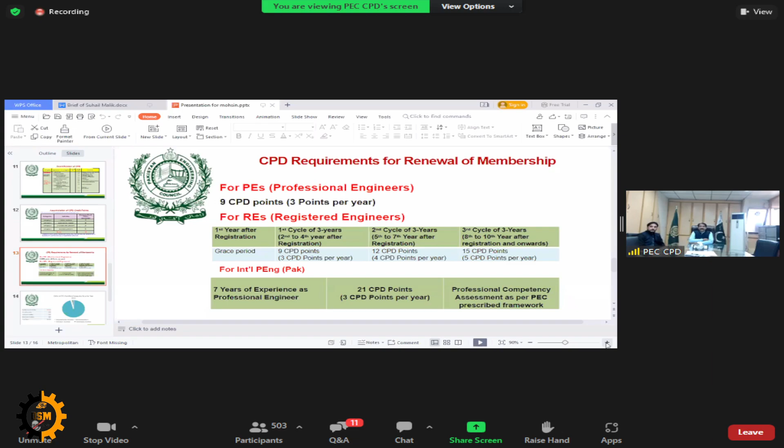So 7 years after PE and 21 CPD points will be required along with other documentary proof of the projects and other things. تو یہ فوکس کیونکہ میرا CPD پوائنٹس پہ ہے, لہٰذا اس کی تھوڑی سی تفصیل بتانا ضروری ہے کہ CPD پوائنٹ جو अर्न होते हैं वो 4 कैटेगरीज में अर्न होते हैं.

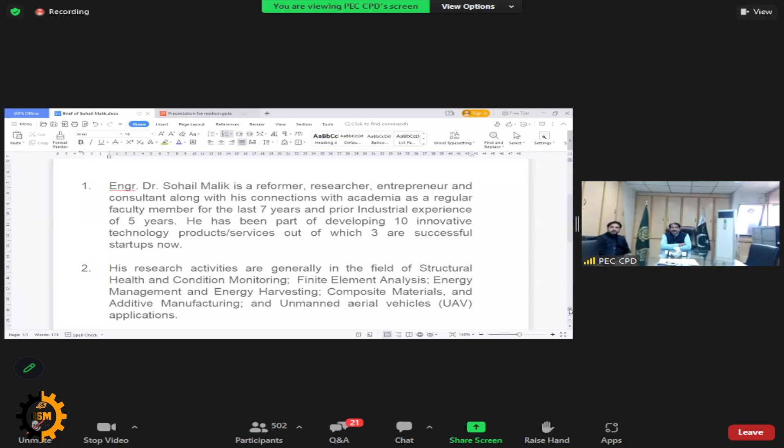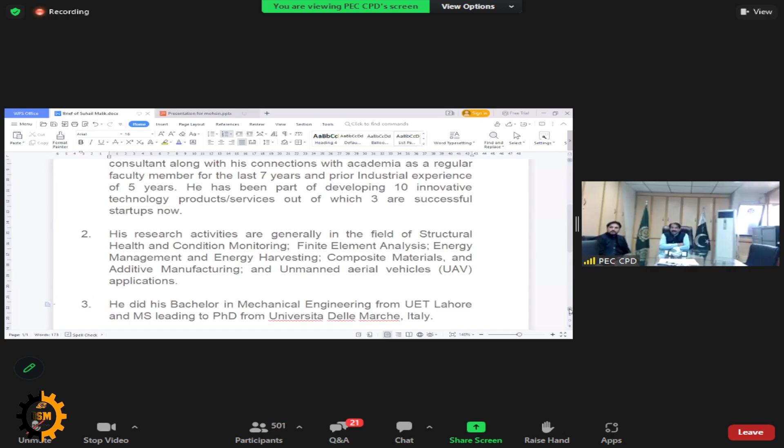Researcher, entrepreneur and consultant along with his connections with academia as a regular faculty member for the last 7 years and prior industry experience of 5 years. He has been part of developing 10 innovative technology products and services, out of which three are successfully startups now. His research activities are generally in the field of structural health and condition monitoring, finite element analysis, energy management, and energy harvesting.

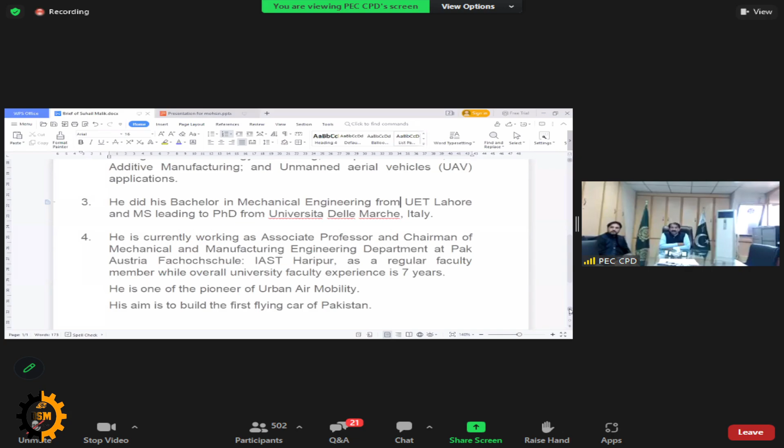Composite materials, additive manufacturing, and unmanned aerial vehicle applications. He did his bachelor's in mechanical engineering from UET Lahore and MS leading to PhD from Universita Delle Marche, Italy. He is currently working as an associate professor and chairman of mechanical and manufacturing engineering department at Pak Austria Fachhochschule: IAST Haripur, as a regular faculty member, while overall university faculty experience is 7 years. He is one of the pioneers of urban air mobility.

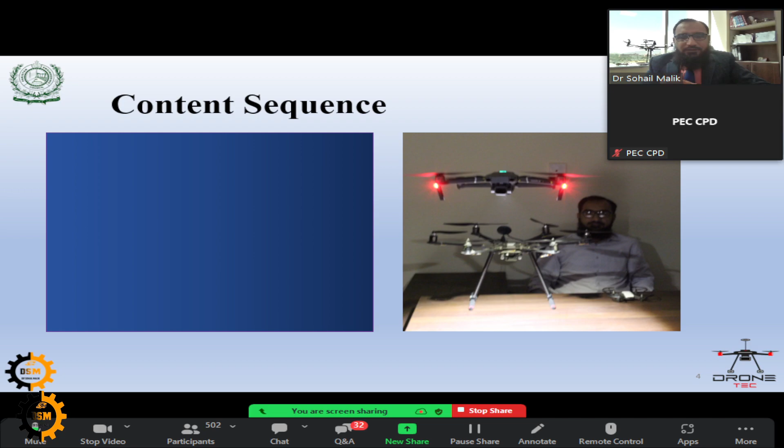Okay, so that was my business profile, and now I will talk about the points I will discuss in today's CPD. The first one is drone introduction. I will tell you what drones are. For those who don't know, and for those who know, you can have some repetition, some practice.

Then I will tell you what is the market size of the drone industry and what potential it has for us Pakistanis. And then I'll tell you how easy drone work is, and how it's a myth that it's a very complex industry and we are not able to do it or make it in Pakistan. So if I'm doing it, and many other friends working in the same industry can do it, you can do it as well.

So I will tell a little bit about it, and then I will tell you the application areas where drones are being used, and of course that would include the discussion of what their potential is in that. And then we have the future opportunities in the drone industries.

I will tell you where you can invest, or if you have the expertise or skills, you can use them. My total conversation is about 30 slides, and if I take 3 to 5 minutes on each slide, you can calculate your time.

And at times I will also try to give you a poll or a question, and if you have internet access at the moment, you can search that and answer me on that.

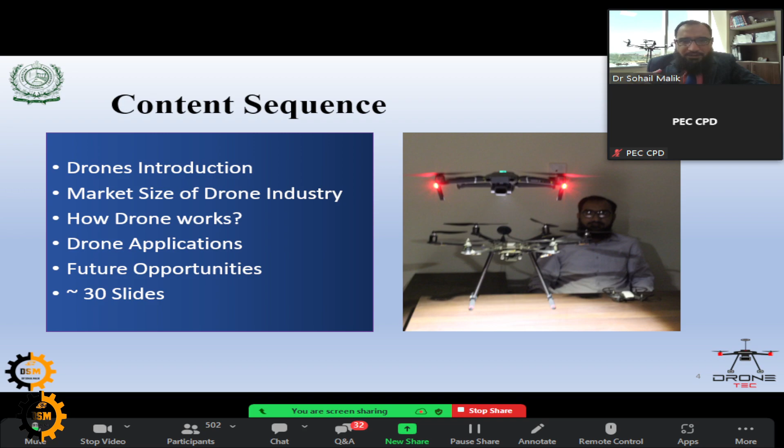First of all, what is a drone? It has many definitions, and the word drone comes from the humming sound - bzzz - if you have something that sounds like that which is flying, that is the basis of the drone. When it came to electronics, basically a drone is a flying robot, a robot which has some portion of automation in it, sensors in it, and a self-powering powered system.

You don't have to plug a wire into it. It is wireless powered, has some battery in it. It is a flying robot, and it is controlled through a remote control. So you have some buttons in your hand, you push the buttons and it moves, and as you command it changes. So typical drones are like this.

And also sometimes it flies autonomously, so you just trigger the control system, and it starts from a single point and completes the job you designed it for and comes back to its initial point without you interfering. So most drones at the moment are semi-autonomous. They are moving quickly towards autonomous, because with the advent of industry 4.0, we are looking for autonomous machines.

Industry 4.0 has a big portion of drones in it, because the fourth industrial revolution will mainly be working with robots, automatic data analysis, and an automatic virtual world, based on if I connect industry 4.0 with web 3. So drones have their specific portion in it - like chat GPT is for AI, drone is for industry 4.0. In industry 4.0, it has the same level of importance as chat GPT has in AI today.

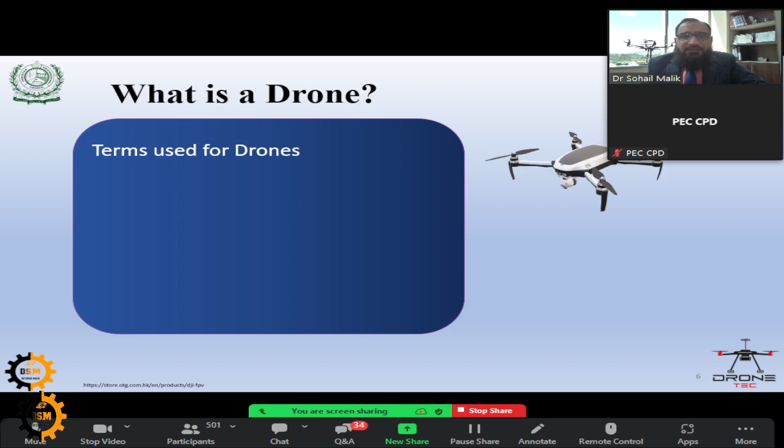If I move forward, we have some interchangeable terms used for drones. If you hear some more terms, they are again drones - it's not that drones are something else and these terms are something else. So UAV, unmanned aerial vehicle, is also a drone - this is another term used for drones. The only property it has is that there is no person, driver, or pilot sitting in it. So UAVs and drones are the same thing.

Also sometimes in research papers, industrial people call it UAS, because it's a system - it has the drone itself, and it is also interacting with a person on the ground or something else on the ground as well. So it is also collectively called an unmanned aerial system. And also I talked about urban air mobility.

So if you see the word UAM, it is also related to drones. The only difference is that it has a person sitting in it, because it is mobility - mobility means movement, and urban means within the city. Normally urban mobility means moving yourself from one place to another. Many of the big companies in the world are working on that - many big names, all the major aerospace industries, are working in the field of urban air mobility, because it has a strong exponential growth expected in the future. I'll talk about it in a few moments.

Then you have another word related to drones - a special type used for racing. You must have seen enthusiast people working with racing drones, wearing goggles on their faces so they can see around, how the drone is watching through its camera. We call these first person view drones, or simply FPVs. They are very fast, and they are very entertaining.

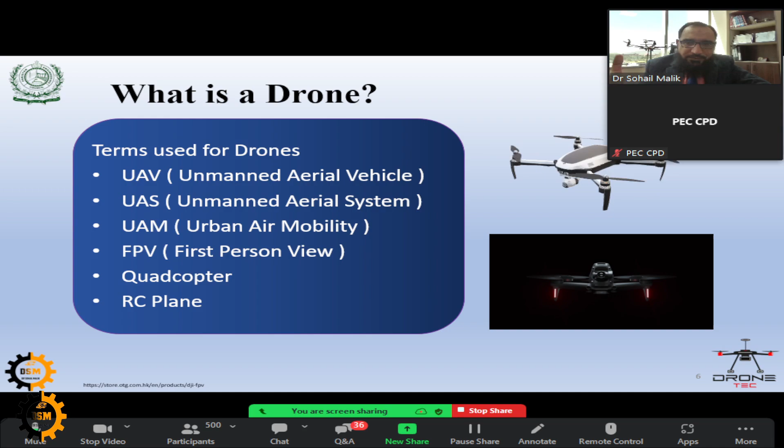We also have hexacopter, we have multi-axial, we have octocopters, and so on. But quadcopter is quite common. And the last word is the RC plane. So some hobbyists, when they use it, they also call it RC plane. Plane means it's aeroplane, it is flying, it is airborne, and RC means it is remote control. So these are some of the interchangeable terms. I'm going very basic so that if you don't have the prior knowledge of it, you can get it.

Moving on, let's talk about the market size worldwide and in Pakistan of the drone industry. And you know that Pakistan is an agricultural country, but also we have done a very good consortium in the aerospace industry as well. You know some names in the military domain, but today's discussion is not related to military at all. So I'm talking about the commercialized uses of drones where we can have a lot of potential. So globally at the moment, if you see the specs which I could get through different resources, in 2022, globally it was a 29 billion USD market.

Compared to many other markets, it's very small if you consider AI or blockchain or other emerging technologies. But it has emerged from 0 billion to 29 billion within no time. And as I told you, it's part of Industry 4.0, so the speculation is very good for it. And if we compare it with Pakistan, currently the drones which are made in Pakistan, and I could get a source for it, it gave me the figure of 1.38 million USD, which is nothing, which is like one grain of sand if you have a full bucket of it.

And this 1.38 million, even I doubt it, because I know all the people who are working in this industry, so I am not sure if it is really the amount of revenue they are generating. Well, market size and revenue are different things, but still, I doubt this value. And if you want to know how much 1.38 million is, consider the textile industry, which is the largest export revenue generation industry for Pakistan. It is 5.6 billion USD as per 2022, and because of the recent economic crunches, it may have gone down from 5.6 billion USD, but these are the figures of 2022.

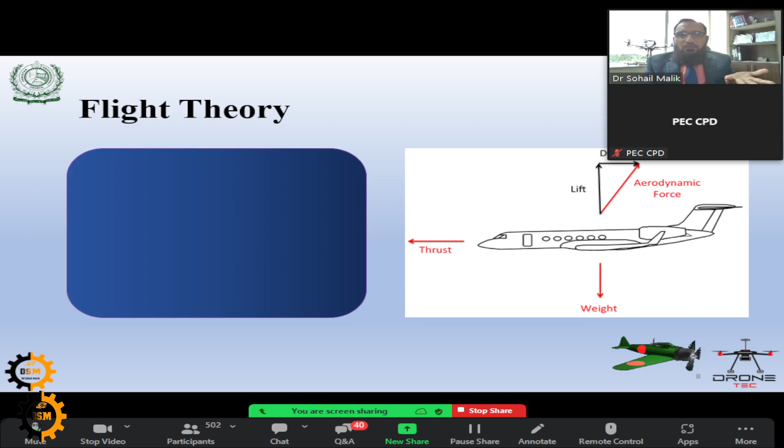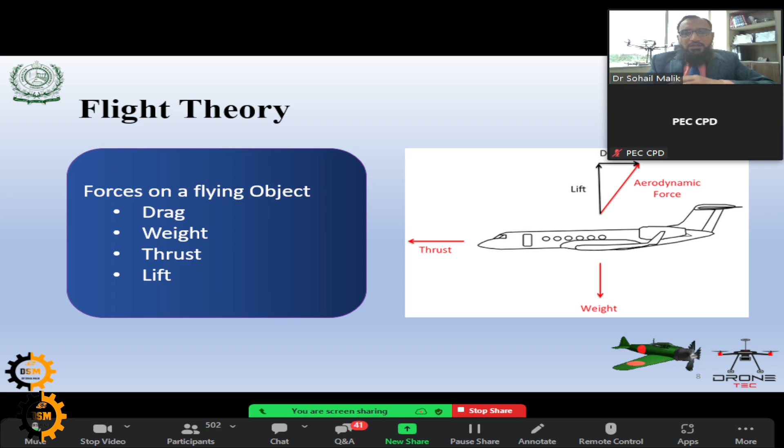Okay, so just to revise it. There are four forces on the flying object. Drag is the negative force horizontally, weight is the negative force vertically. Thrust is the positive force horizontally, and lift is the positive force vertically. And in multi-rotors, we also take thrust vertically as well. But this is the general or typical nomenclature. So if you have understood these four types of forces, I move on.

Some other names of the aeroplane. If I'm talking about some specific parts of an aeroplane or aerospace structure, you should know what they mean. In this picture, which I have taken from the website of NASA, we have something called the wing. We have something called the cockpit. The cockpit is the place where the pilot is sitting. If it is unmanned, there is no cockpit, no person sitting, but it can have a payload.

And wing is the structure or portion in the aeroplane which increases its lift. So lift is being increased by the wing, and I will explain in a few minutes how it works. And then we have the propellers, which are giving the thrust. So the propeller is working on the third law of Newton.

And what it's doing, it is taking the air from the front and pushing it back with a higher velocity. So this creates a change in pressure, and this way the plane tries to move forward. And simultaneously, the wing tries to produce lift. So the plane is moving forward and upward.

So it has some aerodynamic force working like this, and its movements and its maneuvers are controlled by some other things. You can see the elevator, the rudder. The rudder is for its movement about the vertical. This is known as its yaw. The ailerons and the elevators try to give it its roll and pitch.

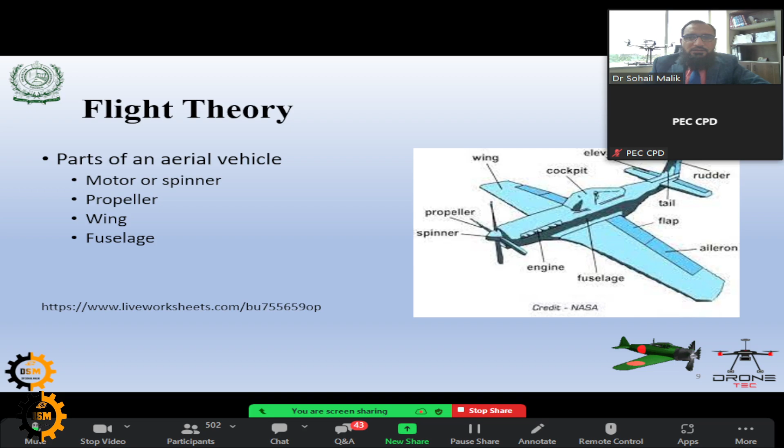And I have given a link where you can go and try this. There is a very interesting quiz you can take. So if I go to liveworksheets.com and then BU755659OP, put it in your browser, you will see this picture. It's a very interesting small quiz. There are about 10 parts shown, and you can label them with these lines and see what your score is.

So we have a cockpit where the person sits. We have flaps, for some movements and maneuvers of the aeroplane. Then we have the fins, again for the maneuvers. Then we have the exit, which is the door where people go in. Ailerons, which are a control surface of the wing.

Then the wing, of course, you can see where it is. Then you have the fuselage. Then you have the engine. Then you have the rudder, and then the elevator. So you can have a try after going to this link, liveworksheets.com/BU755659OP. Okay, so you have to drag with your mouse and place it on the red labels. And when you are finished, you click and you get the results.

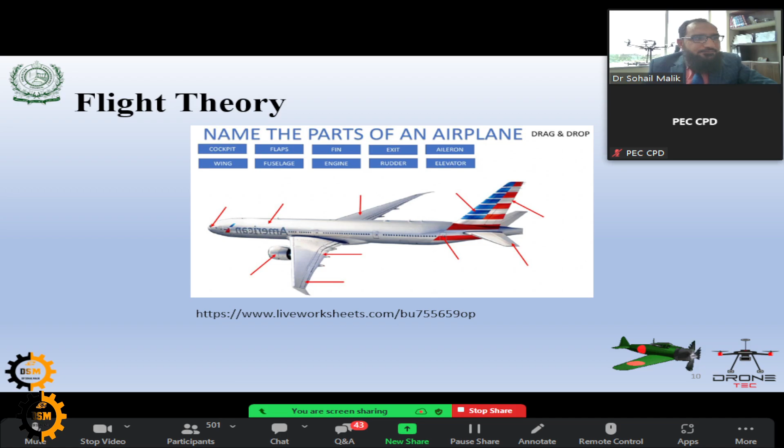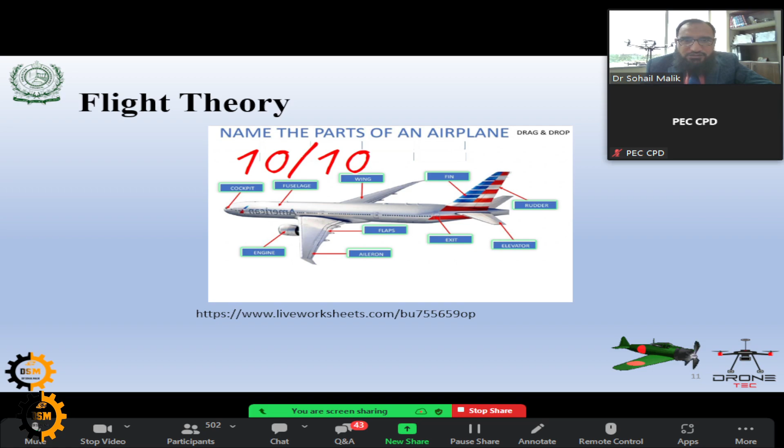Okay, so I go to the next slide. Okay, here is the exact answer. So I don't know how much you scored, but it was a good way of checking your basic knowledge of the different parts of an airplane. Let's move forward to the basics of aerodynamics and flight theory.

How the wing is taking the drone up, how the wing is taking the aeroplane up. That is basically the lift which is created by the wing. So the wing creates lift, and it has a cross section which is made in a way that it takes the fuselage up. And I've shown you some different parts of the wing. Let me move my picture somewhere else so that you are not hindered by it.

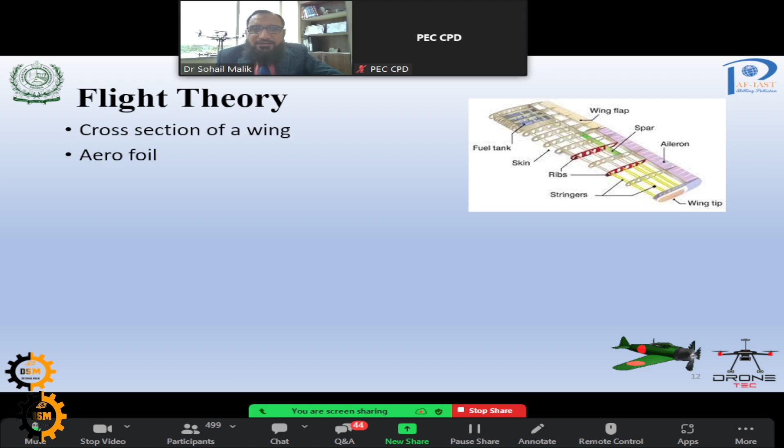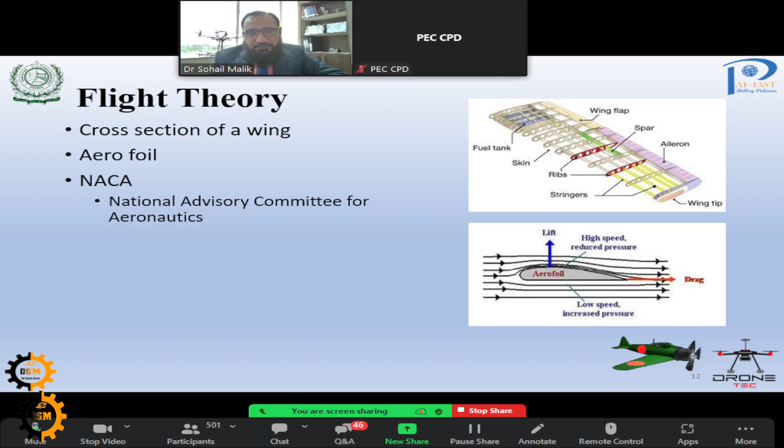If I talk about the material of this wing, when we make it for small planes, we use a very common wood known as balsa wood, which is very light and very easy to machine. But big wings are made of carbon fiber or aluminium alloys, and sometimes work is even going on for titanium alloys because they are very good for heat resistance, they are lightweight and they have good specific strength.

Okay, if I go slightly more into the aerofoil, this was exactly the assignment given by my teacher, and I solved it in the paper of fluid dynamics, I remember, and I worked on this for 5 years. That is the aerofoil nomenclature. You can easily find it on the internet.

Basically, if you see this aerofoil, the left side is its leading edge where the wind is coming, and this is its trailing edge. The trailing edge is very small and the leading edge is quite circular in shape. So air slices here in a way that it is never symmetric. Air from the top is lesser and from the bottom is more. This creates the pressure difference based on which this aerofoil tries to move up and the lift is created.

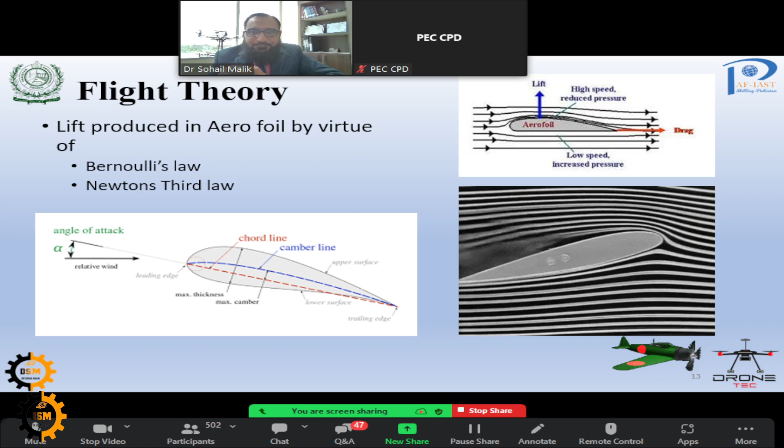This is a schematic from a simulation, and you can see how low pressure is created on top of the aerofoil and how the aerofoil is trying to move up. The aerofoil is slightly tilted, which is its angle of attack, and you can see how the aeroplane moves up when it takes that shape.

Moving forward in flight theory, we move towards propellers, since the wing is fixed and connected to the fixed-wing aeroplane. But propellers are aerofoils connected to a spinner, a central point, and they hover and move. If I take my smaller drone, this is the central hub point, and this is a small aerofoil in this direction, and this is a small aerofoil in this direction, so both are moving and rotating.

This is propeller aerodynamics, and again the air is slicing into it. The only difference between this and the wing is that air is coming vertically from in front of it, whereas in fixed wings the air is coming horizontally. So this is the difference.

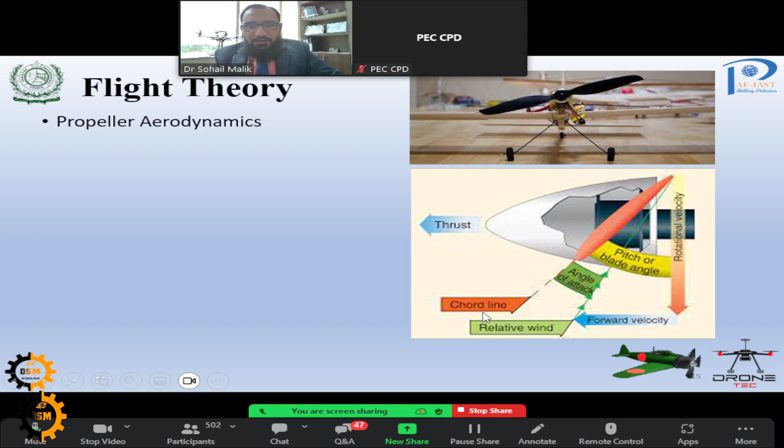I have also shown this, the angle of attack of the propeller. Their angle of attack is normally different, and they have a pitch or blade angle as well. Their chord line and aerofoil are quite different from fixed wings, and thrust is perpendicular to it. So this is the basic difference between a propeller and a wing.

As you keep increasing the length of the propeller, it becomes longer and longer. The thrust decreases but the torque increases, so the overall weight increases, and the torque the drone can carry increases, but thrust will slow down. It can slowly move down, and it's also indirectly related to weight. So if the thrust is not enough, it will not go up; it will fall down. So you have to design a proper propeller length.

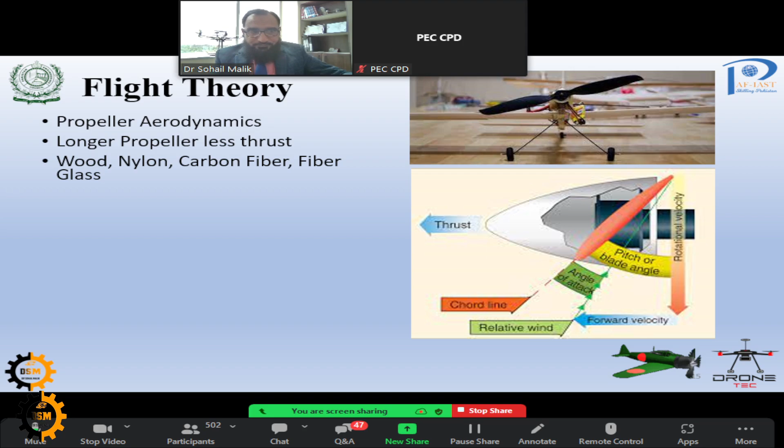Normally the propellers used in small drones are made of wood, nylon, carbon fiber for bigger ones, and fiberglass, which is the most common. All these materials have their pros and cons. Wood is easy to machine, nylon is cheaper, carbon fiber is expensive but lightweight. If the propeller size is very high, we try to make it with carbon fiber, but its manufacturing process becomes tricky. Fiberglass, on the other hand, is in the middle, having some properties from fiber-reinforced composites and some from other materials, so it's cheaper than carbon fiber but has its own manufacturing challenges.

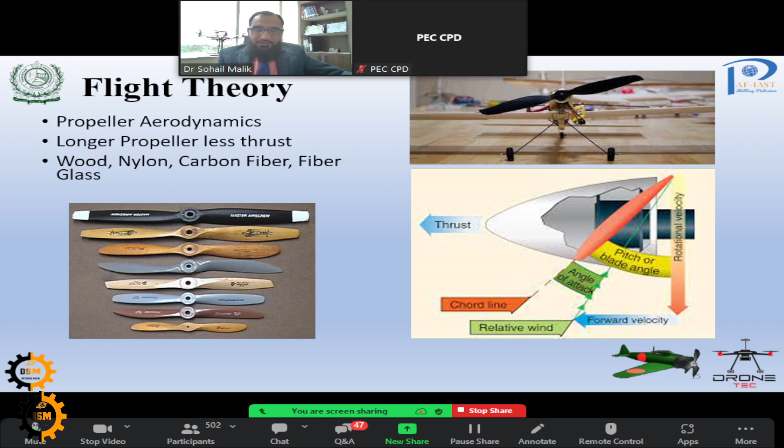So these are some of the propellers. They come in different sizes and different attributes, and in a single lecture I cannot talk about everything regarding propellers, so I'll try to move on. But that is a very important aspect, and you need to have a very good knowledge of it.

Then we move towards RC planes and multi-rotors. As I mentioned, I classify drones into two big portions: remote control planes and multi-rotors. Remote planes are controlled with a remote, but normally they are fixed wings, so don't go by the name alone. When we talk about RC planes, most of the time we're talking about small fixed-wing drones, but that doesn't mean multi-rotors are not RC planes too. Multi-rotors normally have vertical propellers and more than one rotor, while RC planes normally have a single horizontal rotor.

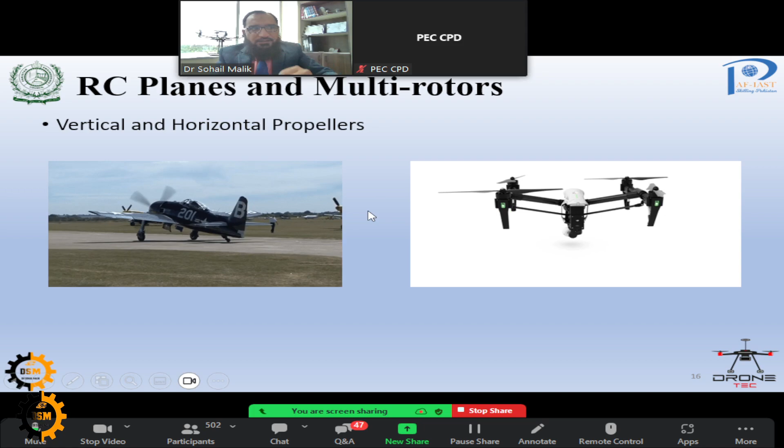So on the left you see a single rotor, which is a horizontal rotor, and on the right you see a quadcopter with multiple rotors, it has four rotors into it.

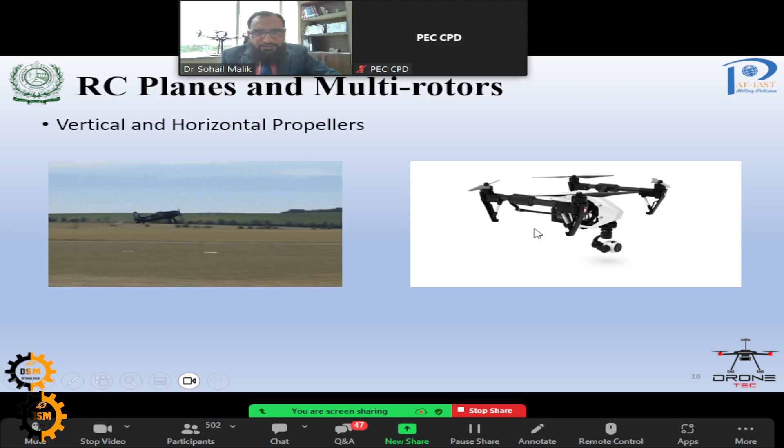It has multi rotors. Okay, moving on. Then we have our how these four thrusters. Now we talk about the multi rotors, how these are moving up. So we learned how the plane is moving up, the fixed wing plane. Now we talk about how the multi rotors move up.

Remember that the sum torque in any drone will cancel out. Their total torque will be summing up to zero. From control or system dynamics, it is still possible to balance a multi-rotor if it has three rotors, but it is quite tricky and will take a lot of energy, and the system will more or less become unstabilized.

So first of all, as designers, we try to kill all the problems structurally and with mechanics. So the mechanics of the system tell us that the total torque of all the rotors should be equal to zero. So if a drone is flying here and stable, its total sum is equal to zero. The torque is summing up to zero, and all the propellers are vertical.

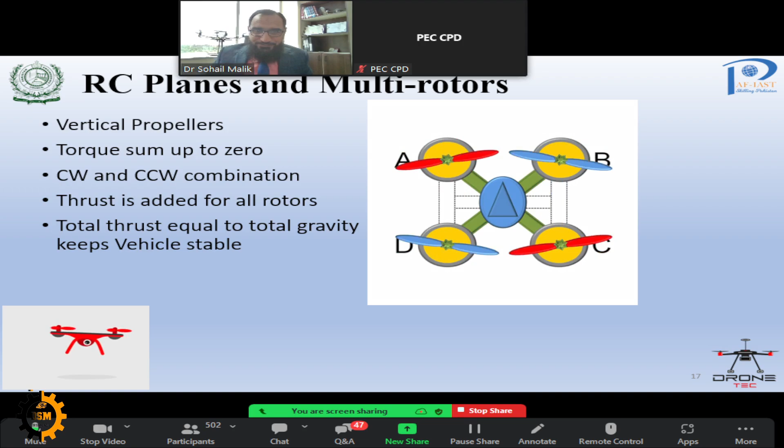So thrust is based on your weight, and total thrust is equal to total gravity. If that is the case, Newton's law works and the drone is stable. And if the thrust is increasing, the drone goes up. If the thrust is decreasing slowly, the drone goes down. And if the thrust goes to zero, it free falls. So try avoiding this.

So this is how your multi-rotors are working. And if I talk about their movements, normally in drones we have four movements: we have throttle, we have pitch, we have roll, we have yaw.

Let's say you increase the RPM of the frontal or rear two, because in aerospace structures we always give names. Normally there are four names: front, rear, starboard and port. If you are sitting in the driver's seat, or in my flying car, your right hand is starboard, your left hand is port, your front is front, and your aft or rear is backward. It's tricky because if you are standing in front of the aeroplane, what you call right is left for the pilot sitting on the drone. That's why they have given this nomenclature: front, rear, starboard, port.

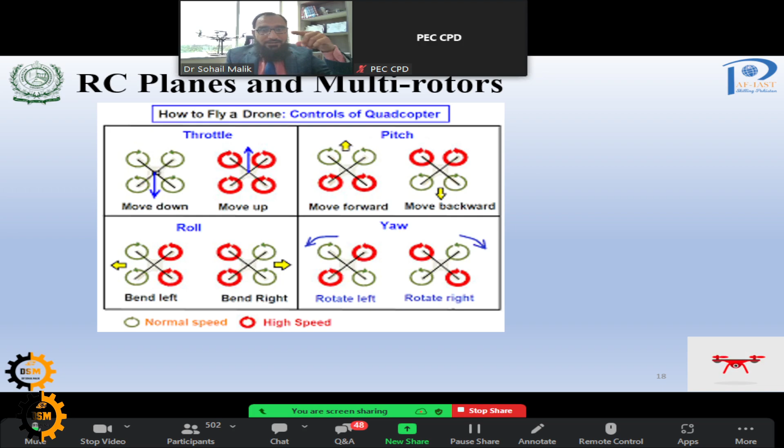Now we talk about the motors which are behind this thruster or rotor, this propeller. This propeller has something rotating — it's a motor. Electrical engineers who know how motors work find this a very interesting field. Drones are not just a field for mechanical or chemical engineers only — it's a field for all engineering disciplines, for anyone with hands-on and theoretical design knowledge, they can work on it.

So let's talk about motors. We know there are generally DC and AC motors. In drones, mostly DC motors are used because it's a battery-powered system, and DC motors are least troublesome and more effective — they don't add extra weight, and you don't need specific additional electronics, which also means fewer losses.

In DC motors, normally we have brushed and brushless motors. In most of the smaller drones, even in bigger ones, we use brushless motors. So we call them BLDCs, where there are no brushes. All the electrical engineers, you can go back and see that they have the brushes in it. The brushed motors have larger sizes, and brushless motors are normally smaller, cheaper and lighter.

Also, brushless motors have higher RPM most of the time, but it is not a Bible, so it can change. But the thumb rule is that normally... the drone which I am telling you, strangely enough, is a brushed motor and it's a very small drone. But most of the drones which we use in our industry are brushless motors, and they are DC motors. So we collectively call them brushless DC motors, or in abbreviation, BLDCs.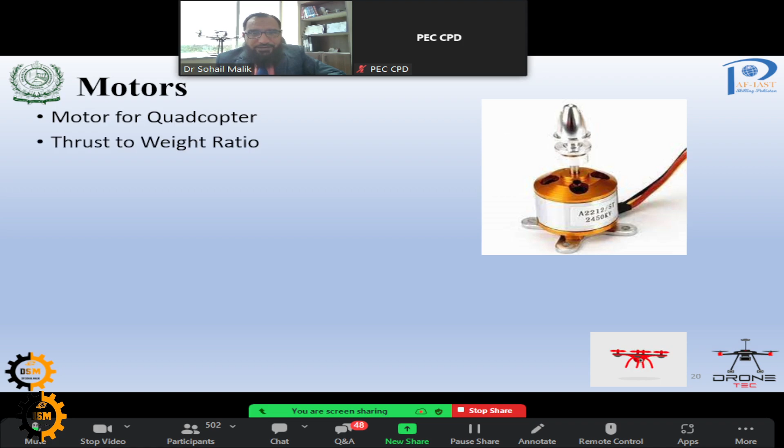And then we have the stepper motors. Normally, we don't use them in drones. So BLDCs are mostly what will be used. A small BLDC motor I have shown you here, which is used in small planes. If you are, let's say, designing a quadcopter, your designer or the OEM will give you the RPM and wattage of the motor. So it has some rating. The rating tells you the kV and RPM of that motor, and also the size of the motor, the number of windings and the width of the winding.

So I won't just divide it by 4, but I will design it for 50% extra, or a 2 to 1 ratio. That is known as the thrust to weight ratio. If I design for a 2 to 1 ratio, I will make the thrusters so their total thrust equals 2 kgs, because 1 kg is the weight of the drone and 50% is the safety factor. So if each thruster gives 500 grams, the total will be 2 kg. And I will look for a motor and propeller together that can create a thrust of 500 grams.

There is more to it, there are other things as well, but I cannot talk about everything in this small talk. You can easily find how to do that on the internet and in the literature. If you are doing photography, you try to increase this ratio to 3 to 1 or 4 to 1, because the controller will have less problem stabilizing the system, and the photography will be very stable.

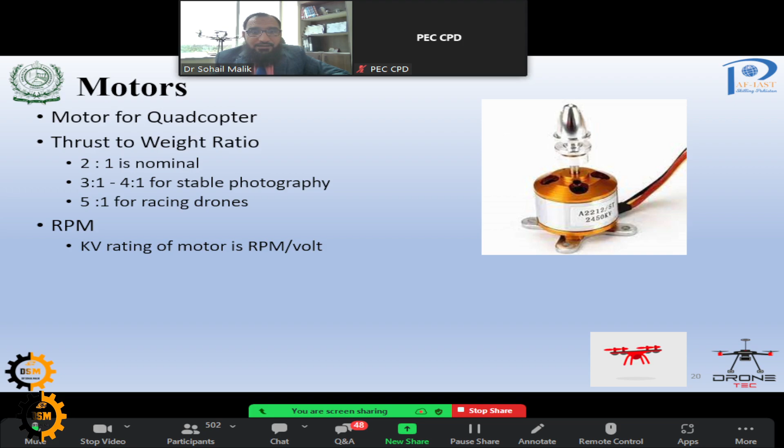But of course, every motor has its rated RPM coming in terms of kV. So the kV will be given by your OEM, and that is related to the voltage you are giving. So it's based on the battery you are attaching to this motor, and you have an ESC as well, which stands for electronic speed controller. You have ESC, propeller, and motor. These are the three things connected in a thruster. We call them collectively a thruster.

Your propeller, your motor, and there is a device, a motor driver specifically, that tells what should be the RPM of this motor. It keeps on changing it. When you give the roll, yaw, every command, the motor will change its RPM. And who will tell this change? ESC will tell this change through the controller. Controller will give the command to ESC that I want to do yaw, and the program will tell ESC to ask the motor to increase or decrease its RPM.

So this per voltage RPM is related to RPM. So your RPM will be connected to what type of battery you are connecting to your system and what is the rating of your motor. And this information you will give into the software of your controller, and the software will try to configure your motors at the end when you are trying to fly this drone. And also, if you know the voltage and kV, you can simply have the RPM. I'll talk about the batteries in a moment.

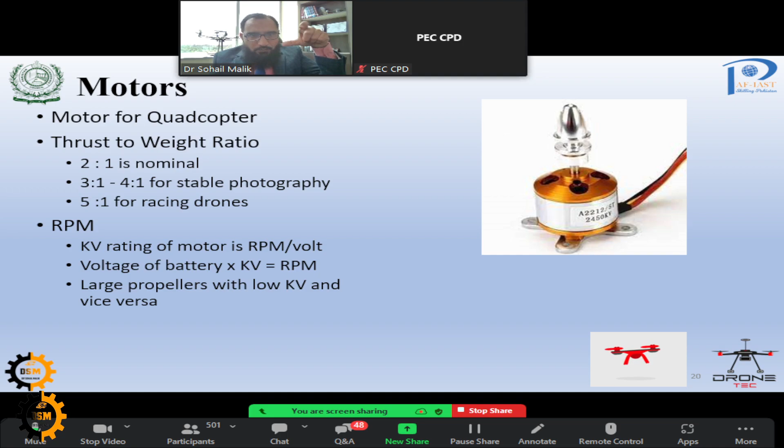And if you have very large propellers and low kV, it means that their torque is very high and their RPM is small. And this is normally what you do. So if you have a high RPM, you have low torque and smaller propellers. If you want high torque, the propeller size will keep on increasing. Okay, so this is how you do the motor sizing. You will see the size or the code of the motor. Mostly, if the motor is very tall and wide, it has more torque because it has more windings, and also the core of the winding. All this tells about the RPM and voltage.

And if you're not an expert on motors, you just have to go to the motor code, which gives the stator diameter and height. It will also help your mechanical designer or structural designer to design the motor mounts for it. For example, if you see 2212, it means that it has a stator diameter of 22 millimeters and the height of this motor is 12 millimeters. So this also gives you the size of the motor.

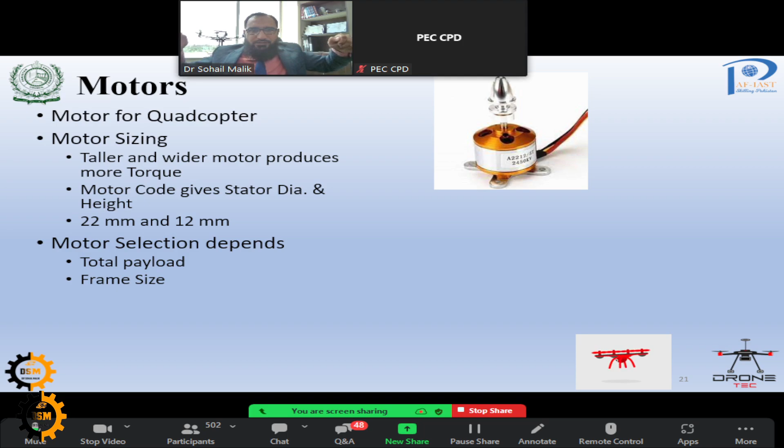And your motor selection definitely depends on the total weight, what is the total frame size, because as you keep on increasing the frame size, the torque will change and the moment will change and you have to control it. And propeller size as well: as you increase the propeller size, to maintain the RPM needed for that drone, you need to have a bigger motor.

And also the application of the drone. If you are going for FPVs, you will look for smaller motors, high RPM, low torque. If you are going for weightlifting or urban air mobility, maybe I will go for the coaxial, a motor which has two axes and two propellers working on the same hub. So depending on the application, you design your thruster, and the thruster involves three things: your propeller, your ESC, and your motor. Here we are talking about the motor only. So I give you just a specimen.

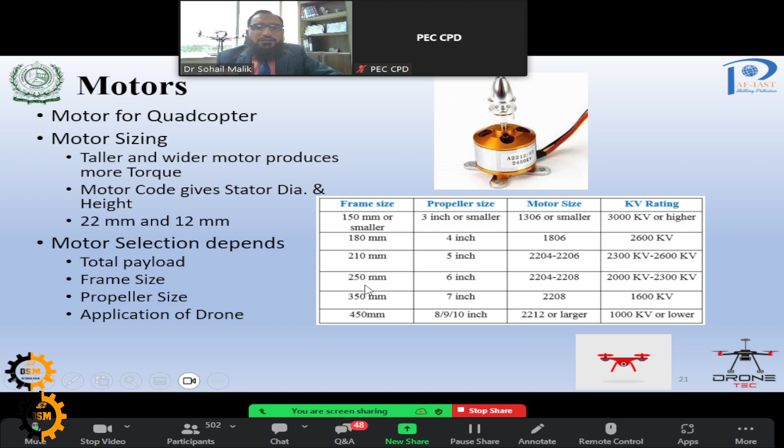You can see, if you know the frame size: the frame size of the drone is based on the maximum distance from one end to the other end. So if I go from here to here, this is its frame size. Okay. And if the frame size is known, this is a very small drone, but as it grows, it's not a linear scale. You have to think about other aspects, specifically vibration, batteries, and moments.

As the system grows, many things you think are linear become non-linear, and you have to design for them. Propeller size needs to be there, what type of propeller you have to use, and the motor size connected with it, and then the kV rating. The kV rating is connected to the battery you are using. Motor size and propeller size are based on your frame size, the payload, and the application. So most of the OEMs now are giving all these three things as a combination.

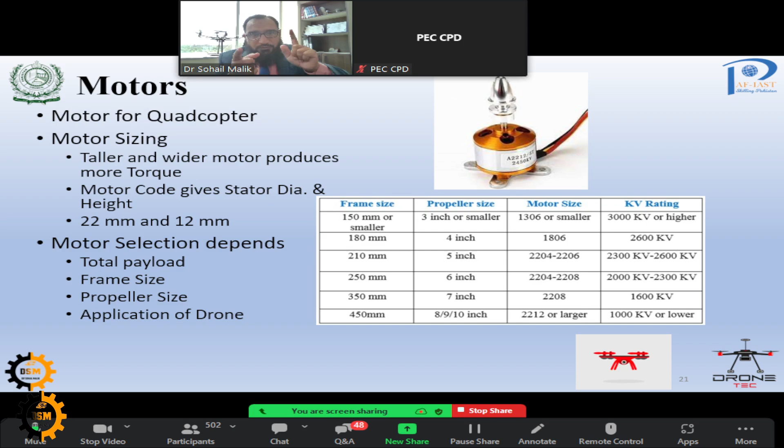Okay, so that was what I was talking about, the thruster. So we have talked about the motor, we have talked about the propeller, and we have talked about the electronic speed controller of the motor, that is the motor driver. So these thrusters are one of the main components. What are the other components of a drone?

We must have a transmitter and receiver, because you have to do the remote controlling with it. There must be a radio frequency transmitter and receiver, and your transmitter and receiver are synchronized with each other, and they have a range based on your application. So you decide a transmitter and receiver based on which application you are going to use that drone for.

And then we have a battery. A battery is very critical, but based on these two hours which I have, I cannot talk in depth about batteries. But in drones, normally LiPo batteries, lithium polymer batteries, are used, and normally they are light in size, and they can give a very variable voltage, because the ESCs and motors need very quick voltage fluctuations, and these LiPo batteries have that property. All the other batteries, if they have the same properties, become very huge and heavy. So we need something on the drone which is light and which gives very quick fluctuations.

So you can talk to your OEM again for your batteries, but remember, the weight of the frame is lesser, and the weight of the motors too. The heaviest part in a drone is its batteries. They are very heavy, and LiPos are the batteries available in the market which are lighter than their competitors. So that's why these are used. They have their own safety precautions as well. So whenever you are using your LiPo batteries, be careful with their specific safety instructions.

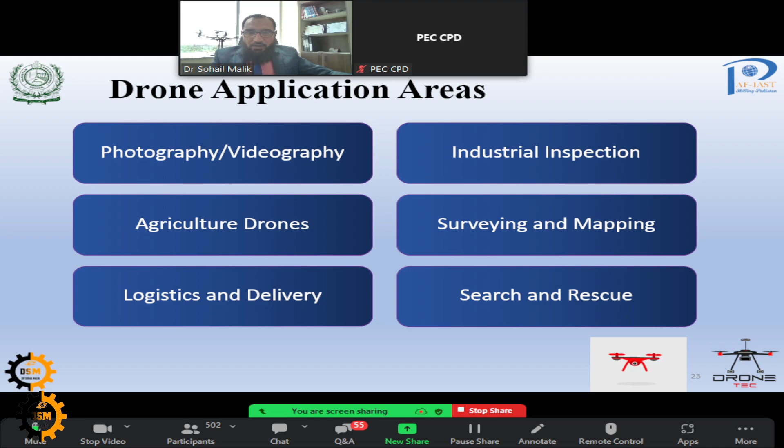And these are not just the application areas, these are also the potential areas where you can work. So if somebody is interested, he can take one of the niches and start working on it based on his interest, or maybe he's already working in some of the fields related to these 6, and he can improve his area or industry by adding drones into it.

So let's talk about photography or videography. Mostly you use high resolution and a very stabilized gimbal. Gimbals don't let the camera move. And let me tell you one thing: if you are making a video or a photo with a DSLR or your mobile, that is less stable than the drone. You can see my videos, which I will share on my YouTube channels. They are quite beautiful and stabilized. You will never see a single movement in them. You would never know that this was taken by drones. So this is a very good thing about drones.

The only problem they have is noise. Their propellers are moving. Work is being done on it to cancel it, but sometimes you don't need the sound. And if you have a mic somewhere else, away from the drone, you can take the sound from there and the imagery from the drone. You must have seen in dramas that people are speaking and the imagery is being taken from drones. So basically they are mixing the sound and videos afterwards, so you can do that.

And then FPVs. I talked about FPVs. You wear goggles and you can see what the drone is seeing, and you start flying it, and it looks like you are flying yourself like a drone. So enthusiasts use it for entertainment. And there are also some drone racing competitions based on FPVs, and that's a very interesting field. There are very few people working on it in Pakistan, 2 or 3 I know, who are making their own FPVs.

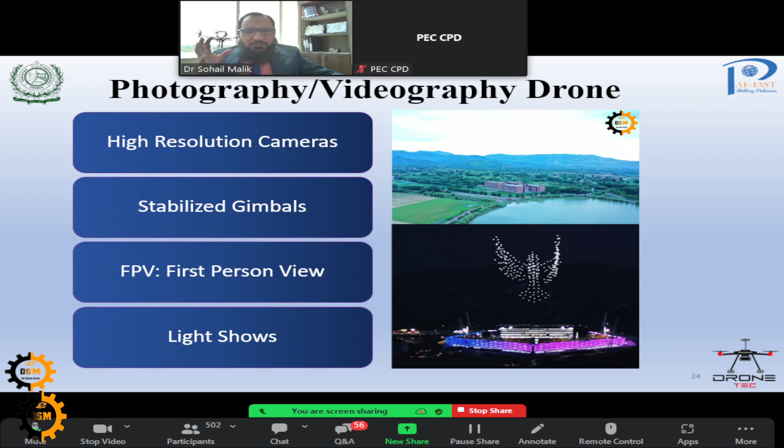Starting from 20 to 30 drones, people have started giving light shows, and they are very expensive at the moment. A time will come when they will become very cheap, and at every other function, exhibition, match or anything significant, you'll see these types of drones working after some time. But currently the one who jumps into the market first will gather more profit. Okay, so this was related to photography, videography and entertainment.

Now let's move to the inspection drones. Inspection drones are the drones used for non-destructive testing or the structural monitoring of something. Like I want to inspect a factory. I want to inspect if heat is coming out from a chimney, or the fire is leaking, or I want to go inside the chimney and see what's happening inside, that there is no crack, no sediment, no foreign thing coming into the chimney.

I can have specialized drones with lights on them and different types of sensors on them. So structural monitoring is a very common aspect of inspection drones. And I talked about railroads and rail inspections.

The project I'm doing, I'm building a drone. Just wish me good luck. That drone will be able to run on the track. I'll tell you more about it.

It will be moved like a thela. You remember we had a very old system of railway carts which were taken from one point to another, and there were even thelas run by people. They were hand driven, human powered. And this is a very new way of inspecting the railroads. It will have four wheels running like a rail bogie on the railroad, and the vehicle will be inspecting the rails for cracks or any flaws.

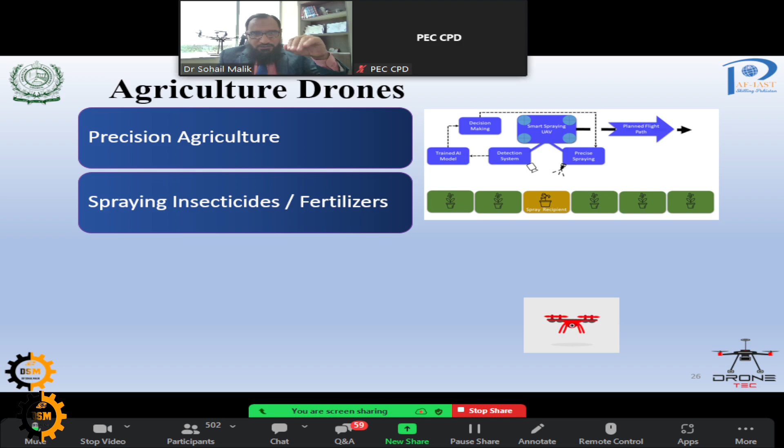This AI model will help you in your autonomous or semi-autonomous spraying. Currently in the market, people are just spraying, but you can have more add-ons into it, and it has more potential. You have monitoring sensors on them, you take help of your monitoring system, computer vision, and IoT in agriculture. There is something known as precision agriculture and something known as smart farms.

I am working on one in my university in Pak-Austria Fachhochschule. I've requested the administration, it's a very interesting model. You see a professor working in commercialization and different fields. I have taken a place and I am working in a group of AI where we are together working on an agricultural field, where we will be making a smart farm.

The smart farm will be yielding, let's say, tomatoes for 365 days a year. You know that tomatoes sometimes become 400 rupees a kg, 300 rupees a kg, and sometimes the farmers are throwing them in the fields or in the canals because they cannot afford the transportation of this tomato into the market.

So this smart farming will help us stabilize the supply chain of crops in the market by making it more productive and predictive. You really know what type of crop is coming and when it's coming. So this is really helping you decide the supply chain of the market.

And this smart farm, how will it look like? It will be a completely closed environment, and if the soil is there, the sensors will see the soil and tell what is the level of pH into them, what is the level of minerals into them, what is the level of moisture into them.

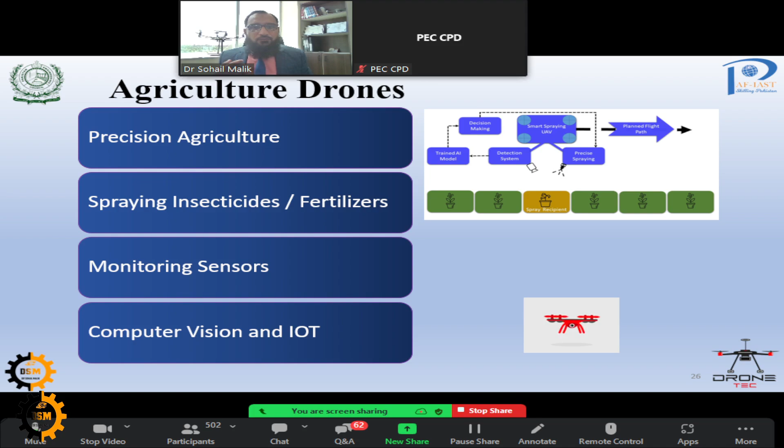Tomorrow, if the fuel is not there, if the dollar to PKR conversion is not there, at least what you need is, if the university's education is not there, if the internet is not there, at least what you need is food to eat. So if you have an agriculture sustainable system, you will be able to sustain, you will be able to live. Otherwise, you will not be fighting for dollars or liters of petrol, you will be fighting for the food. Okay, so it's very important.

The next region of the drones is surveying and mapping. One term we use is GIS mapping, geographical information system. This is normally used by road builders, real estate, constructors, or planners, and they cannot recce each area because there are no roads.

You need a road to go to every place, so they take help of drones. The drones have specified cameras and capture all the information about the terrain. They use 3D mapping software to analyze this and build a 3D model of the terrain, so architects, civil engineers, and GIS experts can work on it and define their designing where they need excavation, where is the level, where is the light. So drones are quite helpful in that.

Also, if you are working on climate action, you want to do counting of trees, identification of trees, the type of trees, or as in agriculture, you want to know the type of yield, where is water, where is not water. In floods, you want to see where is the water, what is the level of the water. So you can take help from this surveying and mapping domain of drones.

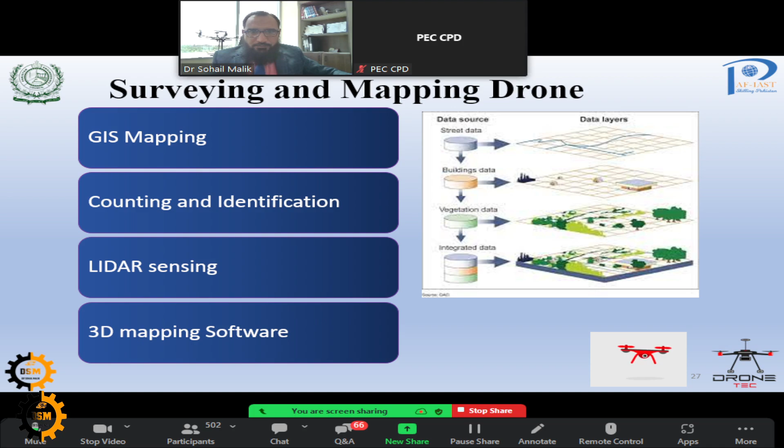So based on all these things and your mapping software, you can have surveying and mapping drones working for you. This is another potential area where Pakistani engineers and industries can invest and help our allied disciplines. We should start thinking smartly and build quality-based products. So this is something about surveying and mapping.

The second last type is the logistics and delivery drone, because I have about 30 slides. Logistics and delivery is another very interesting field, related to taking one payload from one place to another. Sometimes you pick it up while the drone is flying and drop it while it's still flying. Sometimes it comes to the ground, takes the thing, lands again and takes off again.

One very important field, as an example, is food delivery, and I'm working on a specific model at my university. Maybe if some of you next visit me at Pak-Austria Fachhochschule, and we deliver coffee or pizza for you, it will come through a drone made by me, which I'm calling Kuli. So that product of Dronetec is working on food delivery.

There are some other models which have been launched. Last week there was some commercial model, because it has many hurdles. The delivery process and designing of the drone is very easy, but really implementing it in reality has some hurdles. We'll talk about it later.

Another very important field is medicine, or delivery related to the medical field. For example, if I want blood of a specific type needed for a patient within Islamabad, and from a distance of 5 kilometers there is traffic blockage or some other problem, I cannot move the blood from there to here. It also needs specific type of storage. So I can make a specific delivery drone which has a packaged insulated box, and the blood can be moved from the donor to the patient quickly and helpfully.

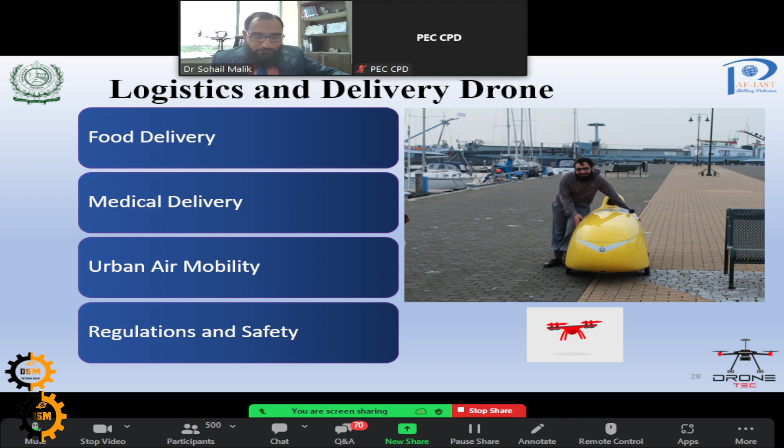One thing I left out in food delivery and medical delivery: it's very tricky to find who is going to take the delivery. If you've delivered a pizza and there are three people standing there, who is the real person who ordered it? So we devised a system for that. There's a QR code and an image sensing system, and the drone will first make sure this is the person who subscribed to the service before delivering the pizza. There will also be a camera capturing the image of the delivery person who took it. It's quite reliable and safer than your pizza boy delivering to you. So this is all about logistics and delivery drones.

Let's move to the last one of today's talk: search and rescue drones. These are used when you have disasters or areas where you cannot move—like the Satpara incident, or people stuck in floods, or earthquakes where roads are broken and you can't move. Or security agencies like Islamabad police are looking for a specific person or vehicle that has gone off the road somewhere. They can take help from search drones based on their computer vision systems, which helps increase safety and security.

Also, if there's a broken bridge or a building about to fall, it's very unsafe to send people in, so you can send drones instead. I had a project with my students inspecting after-earthquake structures to check for cracks, or to look for people stuck within earthquake debris using thermal imaging. The drones are able to detect them. Floods and earthquakes—Pakistan is in that part of the globe where these things are quite common, unfortunately.

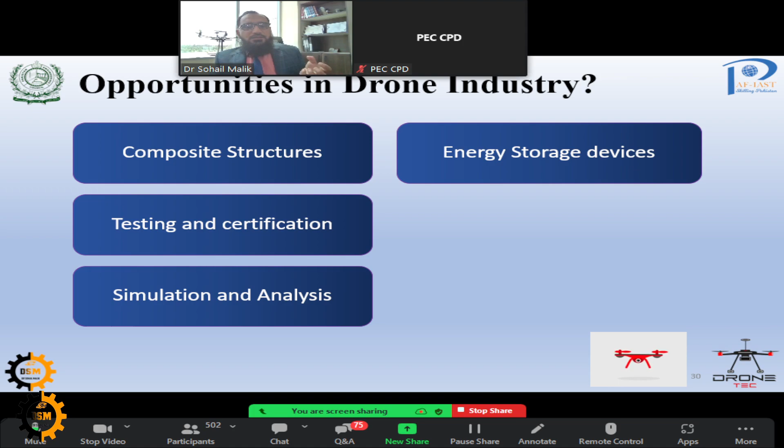Then batteries and energy storage, that has big potential. I'm working near the Hattar region. There are some companies making batteries, and I'm trying to convince them to push their R&D towards storage devices which can be used for lighter batteries. Lithium is the future. Everyone is talking about it. So lithium LiPo batteries have potential. And if somebody is able to build smart batteries, green batteries, with very small specific weight and very high storage, that can be very good for the drones industry.

Blockchain, cybersecurity, and AI. If you have switched to these fields, these are the tools, and you can use these tools in the field of the drones industry. Blockchain, cybersecurity, AI, I talked a little bit about it. Blockchain will be used to have decentralized trust. If a drone is coming for you, you really know that this is the drone you asked for, and the drone will know it is going to the right person.

Cybersecurity, to avoid information security breaches or internal or external attacks by hackers, software or hardware. And then AI: if you want to have automated drone systems, AI will come into play. Most of the time it's computer vision, but sometimes it's also machine learning as well, so it's not always like that. And the last thing, if you're good in electronics, you can come towards the electronics portion of it.

Most of the things in drones are coming off the shelf from the Asian market outside Pakistan. But there are people who are working as integrators, and there are very few people. People even have technician jobs, like only piloting the drones. So these are some of the fields.

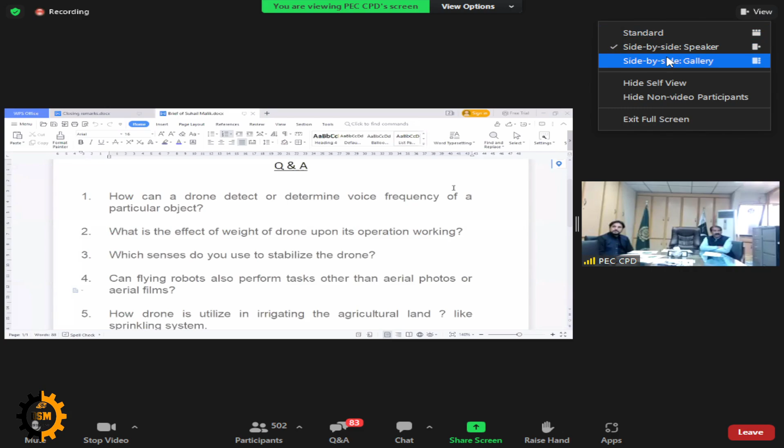Okay, so first of all, we have a question: how can a drone detect or determine the voice frequency of a particular object? It's a very technical and deep R&D question. Normally, voice frequencies are not dealt with in most of the use cases I have seen, because the thrusters already have their noise. You keep increasing the number of rotors and you will find the drone humming. It would be quite difficult to sit in my office with a big drone working. So that is typically very difficult.

But yes, what happens is you use ultrasonic sensors, most of the time more than one, and all these sensors have a specific frequency range. Based on their feedback system, their transmitter and receiver, you can further narrow down the frequency range, but the exact frequency is quite tricky. Of course, it depends on the inspection or sensing system you have put on your drone. So voice frequency of something is possible, but it has its distractions, and noise cancellation has to be done before that.

The second question: what is the effect of weight on a drone's operation while working? So that is the question. It's a very basic design question. I've talked a lot about it. When we design the drone, the first questions we ask are: what is the payload, what is the weight you want to put on it, what is your flight time, and what speed you want it to reach.

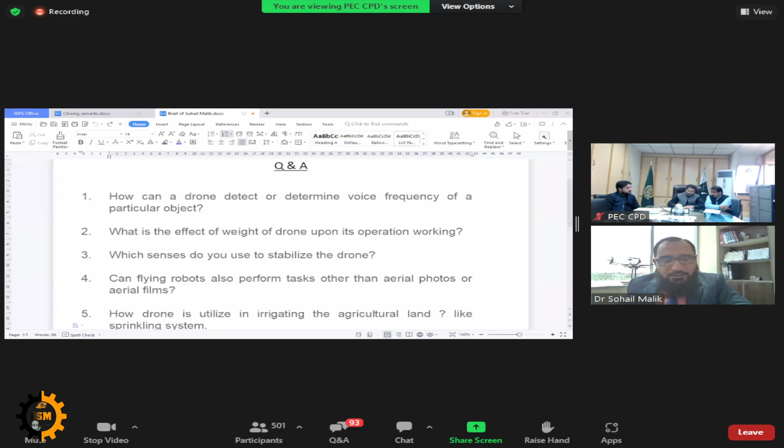So if you are going to take photos of something, this vibration will cause distortions, and that vibration is related to your weight, because weight is mg, and all vibration systems basically depend on two properties of the system, m and k, mass and stiffness. So when you change the mass, the overall damping ratio is changed. So that's how the weight works in two of the major things I've talked about, but there are many, of course.

Then we move to the third question: which sensors do you use to stabilize the drone? What stabilizes it is basically the navigation system and your gyroscope. It is available as part of the controller, and it defines the orientation, because first you statically balance your drone, and then with the help of your controller and gyroscope you define where it moves, where it wants to move. The controller has the algorithm in it, where it tries to balance its cg on a specific level, and it keeps changing the rpms of all the thrusters so that it can have the balance point where it needs to be.

Typically, if you are not a deep researcher of that, the controllers available in the market have some hit and trial configurations available. So you balance your propellers, your motors, and your structure first, and then you configure your motors, fix your drone on a platform, and give different commands, and your controller software, normally given by the OEM, tells you which motor or which rpm you have to change in order to make your drone stabilized.

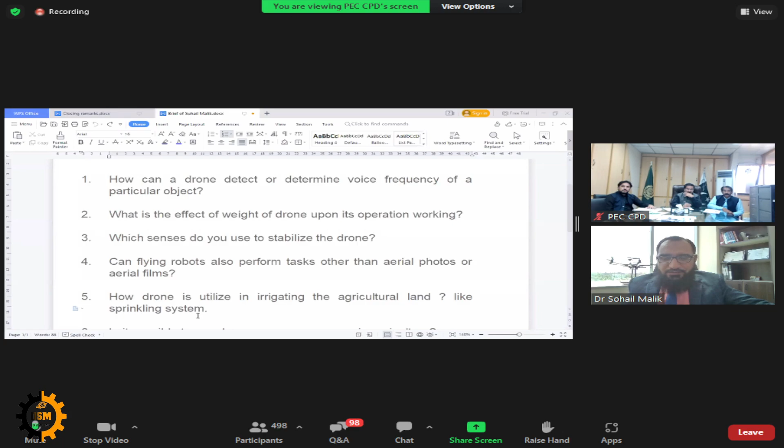The fifth one is how drone is utilized in irrigating the agricultural land, like sprinkling system. So I talked a lot about it on one of my slides, that when you are spraying anything, you can have a different spraying system, because a spraying system has a pump, has a spraying tank, and then it has a nozzle. So based on the configuration of the nozzle and your flow meter, your flow controller, you can increase or decrease the amount, and you can also change the orientation and direction of the nozzles.

So where do you want to spray? That's very easy. You tune it, of course, for the first time, but once it's tuned, it is quite easy. But normally you do one task at a time with the drone. So if you have started a sprinkling system for some specific type of crop, it will be specific for that, because it is very tricky for different crops. So these are the 5 questions.

And I also talked about the smart agriculture system as well. That is my favorite. And after 6 to 8 months, hopefully, I will have that smart system working here, and you are welcome to visit it. Sixth one: is it possible to use drones for spray purposes in agriculture? Of course, I'm again telling you, the first product which was made by my final year students in GIK led me to this startup, and of course we started spraying.

And I missed one thing. One is the fire suppression system. We called this drone system a multi-purpose spraying drone, because it could spray different things at different times. So if you have water or ABC powder in it, and there is a fire starting at the top of a chimney or top of a hill, by the time you reach it, it will be too late. So you can use that drone, and it will go to that spot and suppress the fire.